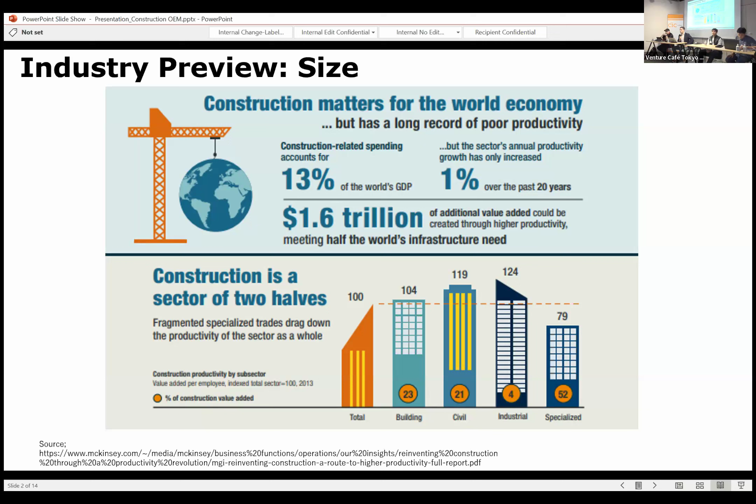I don't have the percentages top of mind, but a huge amount of contracts actually end up in litigation - settled in the courts rather than amicably, just because the general contractor always says what the architect's designing is impossible to build, blah blah blah, I need more money. So it's a lot of fun. One reason to talk about this is each of the roles in the construction space have a very different objective, so it can be quite hard to get different people to sign off on getting these innovations into that space. So that's the background on this slide. Again Mike, jump in if you think there's anything we should double click on.

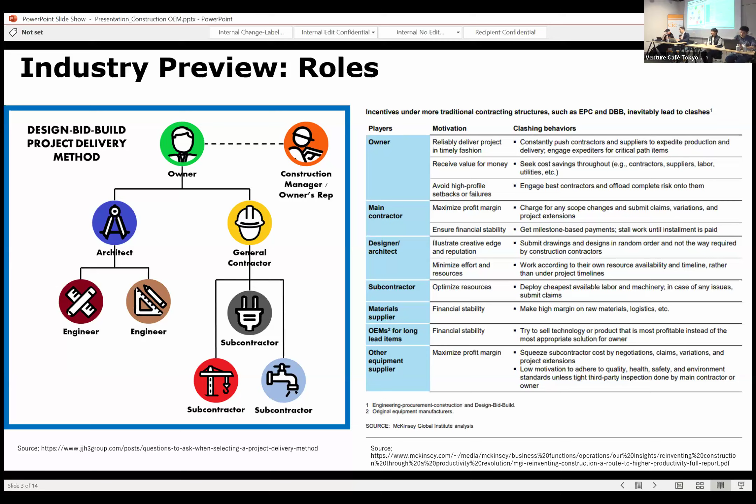This is 1,000 times more than I know about construction, so please, you have free reign. It's 1,000 times less than a general contractor would be able to add, but yes, if you want to double click, be the questionnaire. Sure.

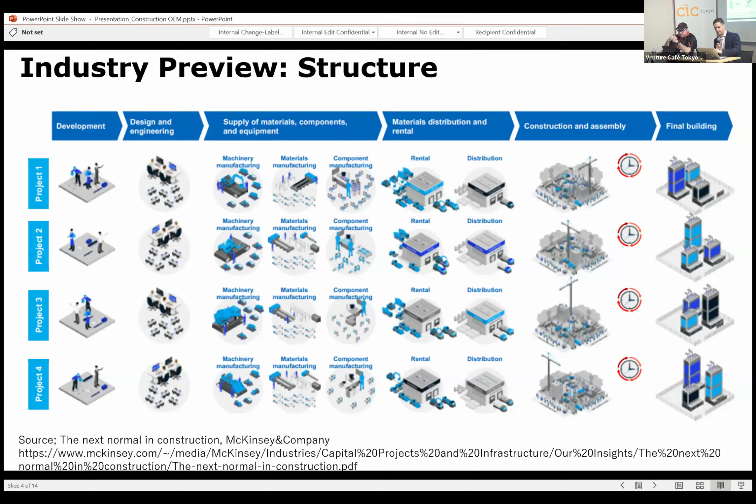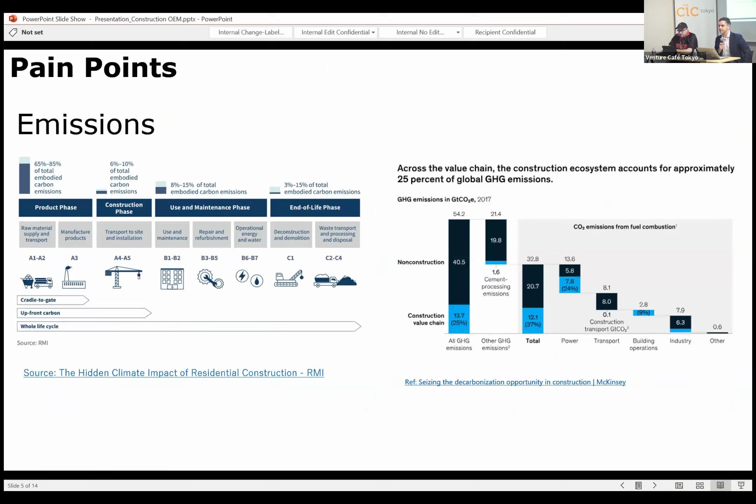I'd like to highlight some of the pain points, and this will probably lead into discussions on what we can do. One of them was obviously emissions. Up to about 85% of the embodied emissions are actually in the product phase, while the products are being built and constructed. We see on the right-hand side that about 25% of global emissions are coming from the construction industry.

Yeah, I have a question.

Regarding the labor shortage, do you find that there are more shortages in certain parts of that chain than other parts? Like maybe a lot of people really don't want to be on the site building, but they're okay with doing transport or production. It depends.

Yeah, that's a really great question. And the answer is it depends. To expand that a little more, it depends on the country. If you talk about Japan, the 2024 Nen Mondai that people talk about with the labor laws, which impacts a lot around transportation, you don't have enough. People aren't allowed to work as longer hours from a safety perspective. So different markets have different issues, but globally there's just a shortage.

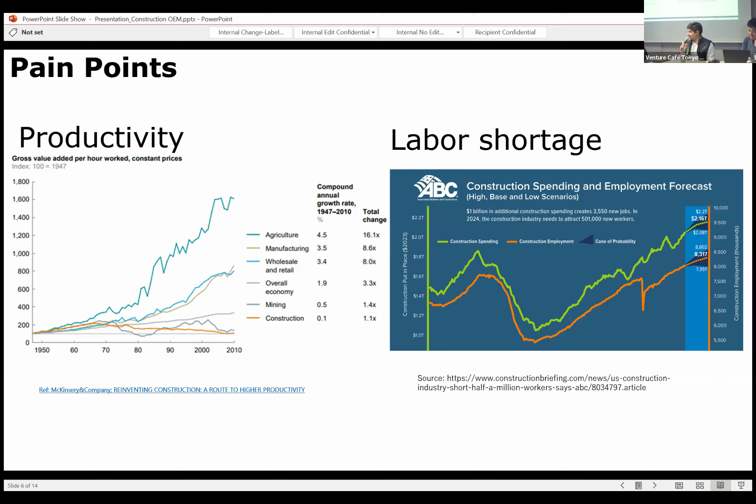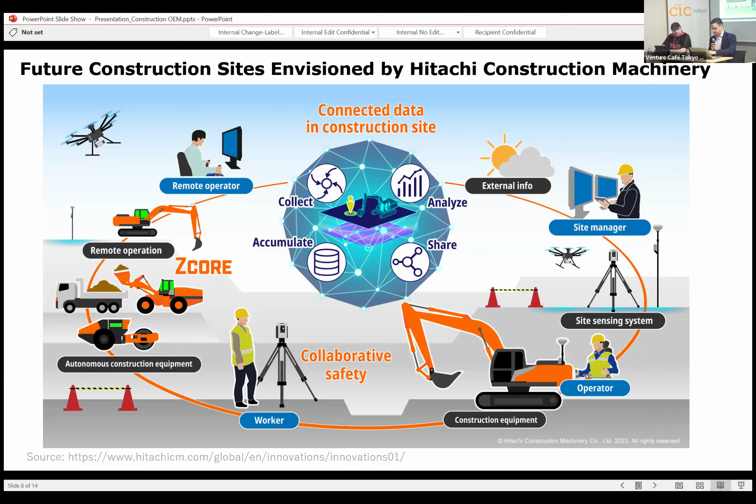So there's two ways that we're looking at this from an OEM perspective, again being quite specific, so you'll have to forgive me for that. One is having that real-time digital twin. So construction sites are moving towards having a BIM available, and BIM means building information model. And if you have a really good quality BIM available, you're able to measure the progress against how it should be. And to get to how it should be, you need to be able to bring that data out of the site really effectively. So we've made some investments in that space in some Japanese startups, which are helping us to do that.

Quick question - if you can go back one. The ZCORE in there, how much is that a black box versus you being able to define inputs to outputs? If you say it's making judgments, is it very definable, or is this more of a potential for hallucination, Gen AI type issue? No, it's not. It's a lot more stable than that.

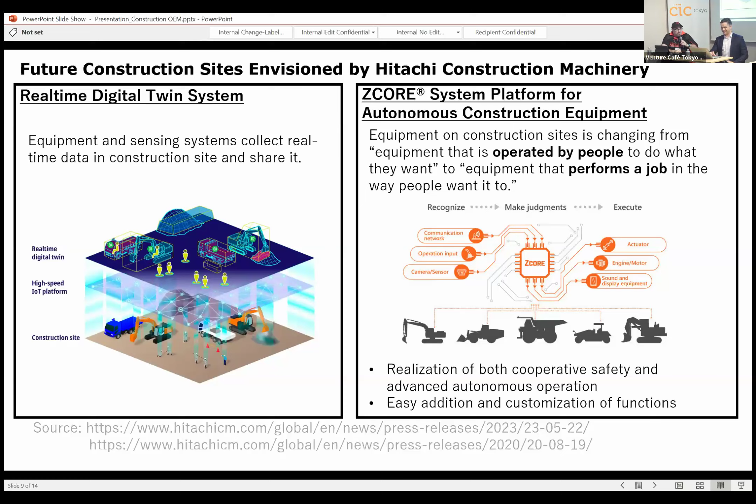Actually, this might be—how many more slides do you have? So this might be a good transitional point. Do you want to explain what drive-by-wire is in terms of traditional robotics and automation?

Sure. Well, drive-by-wire is essentially a way of saying that before, we had cars where you could basically send commands and have things move, like the steering wheel or the gas pedal, or even think of a plane. So basically it was all mechanical, which means someone actually had to be there, push something, and that would be a hydraulic or whatever, and something would get actuated, something would move.

But instead it all became, let's say, computer control, in the sense they were all electronic signals on something called a CAN bus, which meant digital information was being sent all over the car, and based on certain little computers receiving that information, it would do certain things, like put more fuel into the engine or increase the brake pressure. Things that were all done by the human, now a computer has to be able to do, but the computer doesn't have arms or legs, right? So that's why the concept is wire—as in it's wired by digital means, but it's actuated by a computer, essentially.

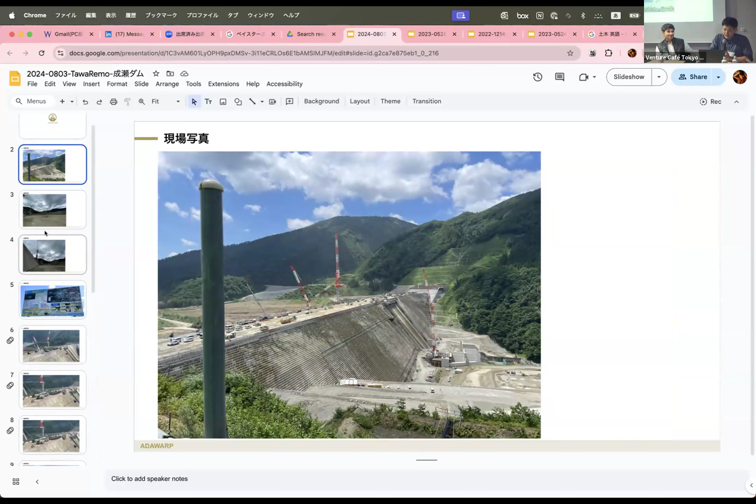Yes, so first I'm going to tell our company's use case. This is the construction site of the dam in Akita. This is called the Naruse Dam, and this construction site is Kajima's project. It's open, and we control this tower crane from 1 kilometer away.

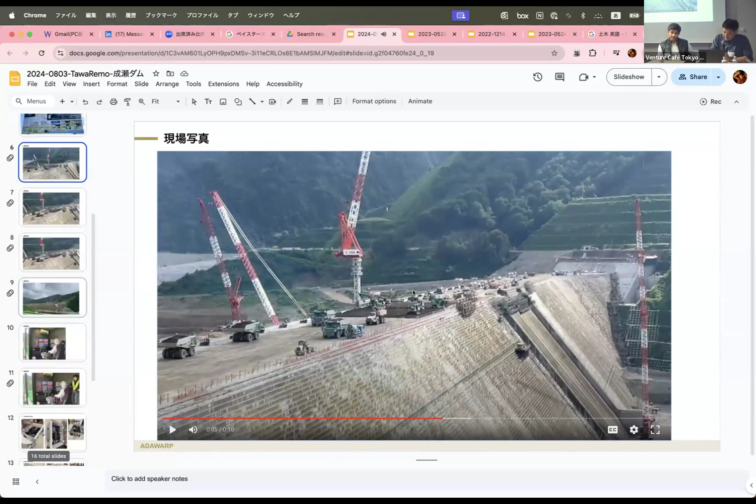Is there anybody in the crane at the time as a sort of safety backup, or is no one in there? No one's in there. Wow. Yeah, so this is the cockpit.

But the point is it's still 1 kilometer, and this is the construction site for a dam that's really far from the city, so no one wants to go there. Right now it's 1 kilometer, but they want it to be more, like 10 kilometers or 50 kilometers. But the point is, if some accident happens, who's going to be responsible?

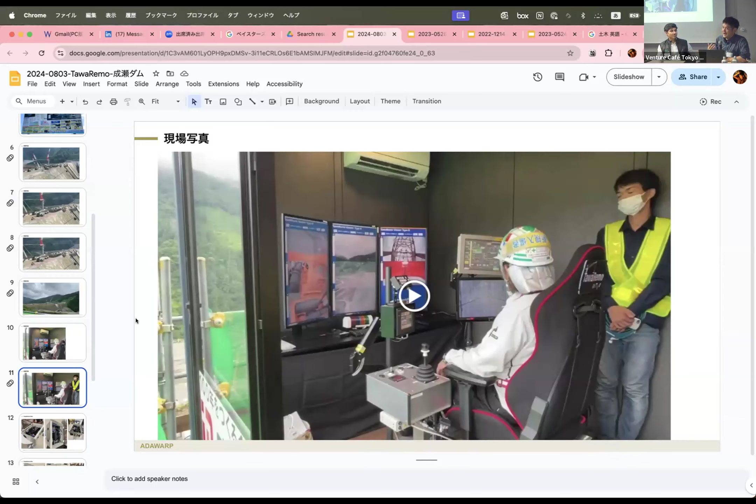A real example is lightning. Because the crane is really high, it's often struck. After lightning strikes and the PC or something is broken, who's responsible? That's the current problem we're facing. And latency, of course, is really important, but recently we can do Zoom or Teams, there's a lot of technology now, so currently latency is not a big problem. It's more about construction site safety and care.

I guess if you're not operating in terms of silicon wafer processing or online gaming, you're not operating at speeds where you necessarily need to be super quick. But I'd imagine there are certain places where that matters, like a safety system meant as a backup for a wire breaking, where something needs to act very quickly. Are there any critical points in the chain that need super low latency, and is that possible now from a distance of 1 kilometer or more?

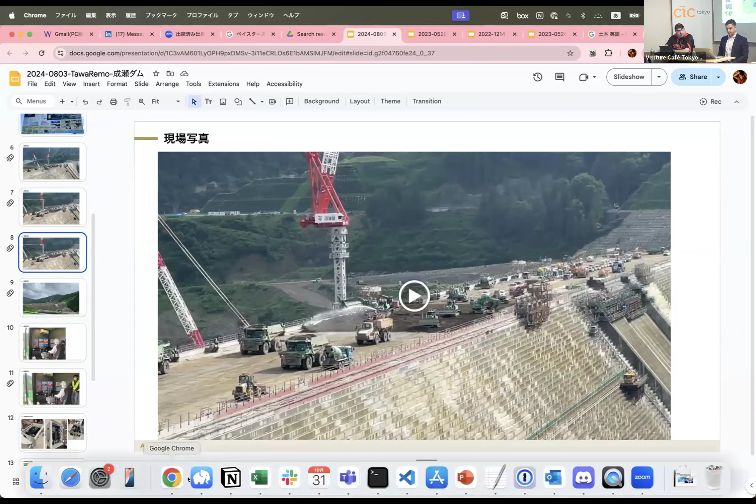The latency is about 0.8 seconds from the United States to Japan. Inside Japan, the latency is more or less 0.3 seconds. At 0.3 seconds it's okay, but after more than that, like 0.5 or 0.6 seconds, the human starts to feel the latency.

It's gonna be late, so it's a little bit more dangerous. So that's the point, but the technology is now coming.

Can I comment on that one? We had the same problem on construction sites when we had people operating remotely. Around 0.2, 0.3 is a really good line where, like you said, there's a lot of older people on construction sites and they've been doing it for a long time and they're like, this game doesn't work, and they just get frustrated and go out and sit in the equipment. So yeah, that's a big issue.

As long as they don't rage quit the construction site. Yeah, we could have a whole session on latency, so I'll skip my comments.

But I used to work for SRI International, and when they first did the first iteration of the Da Vinci robot, which became the Intuitive Surgical robot, it was for remote battlefield surgery. So we're talking like thousands of kilometers, and they even did a demonstration of it basically remote in space. So I guess there are strategies to deal with latency, and many ways to solve it, I would say.

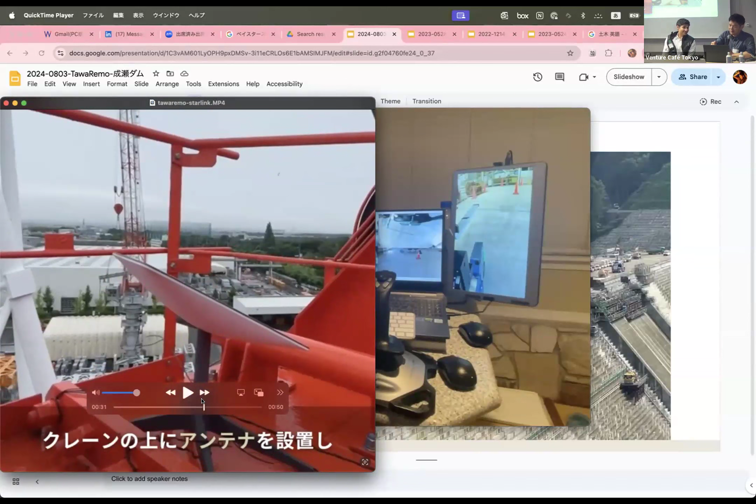Yeah, now recently we use Starlink for the remote control. For example, we try to control the tower crane using the Starlink system, putting the Starlink antenna on top of the crane, and we're gonna control it.

But the problem is the connectivity is sometimes unstable. So we're gonna develop the technology more. But to the moon, maybe it's gonna be 1 or 2 second latency, it's gonna be huge. So we should put some AI inside the construction site to work by themselves, or we have to create that kind of system, I think.

Exactly what Avik was saying. Yeah, I was trying to say that you have to build more intelligence on the edge. Yeah, essentially.

So actually, just very quickly related to that, this reminds me of something Toyota was focusing on. Instead of going for full autonomy in self-driving, they also had a driving system called Guardian, which was sort of a shared autonomy system. Do you see this in construction now? Just the introduction of some mild autonomy to help assist rather than full autonomy or full teleoperation? Yeah, 100%. Can I share a video?

Would that be okay? And do you have the score on the game as well? Have you been checking? We forgot to ask.

So give me 10 secs. Sorry guys, oh, where did the PowerPoint go? No, it's not allowing me to share the PowerPoint anymore. Yeah, I can do the whole screen. Sorry guys, technical issues. There we go.

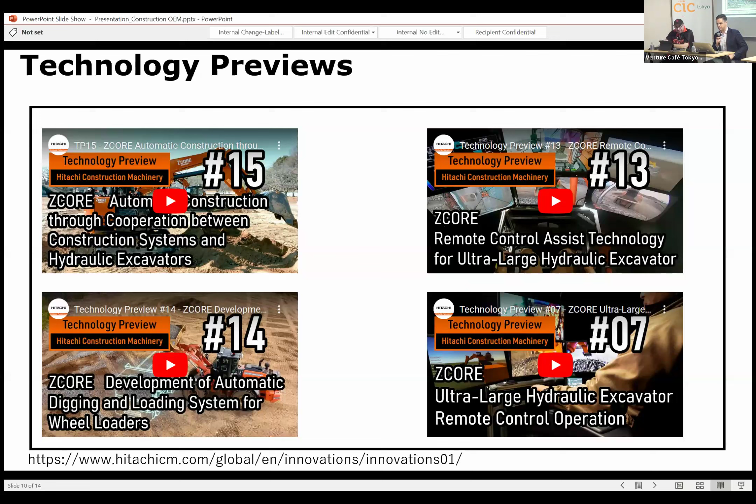We're back. So there's a few different angles. We didn't really touch on it too much, but the thing that robotics are really good at doing is repetitive tasks, right? And the thing that's often happening when you're doing excavation... let me go to this one. How do I go full screen? I can't, never mind, okay sorry, everyone will just have to have their glasses on. The thing that's often happening when you're doing excavation is, number one, you might be far away.

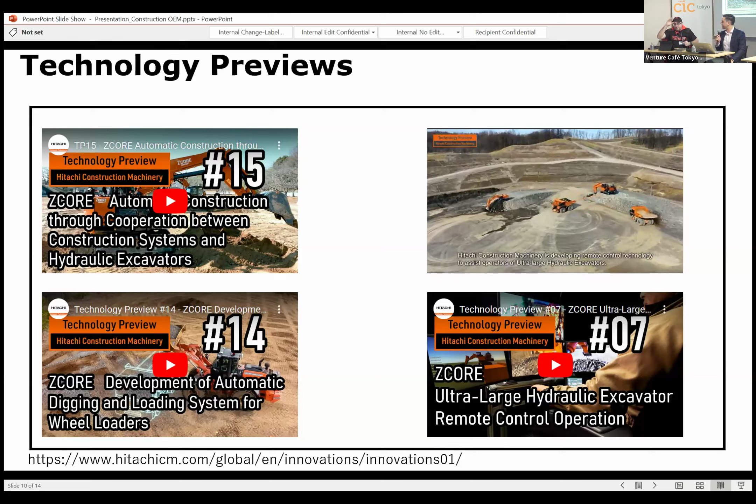So for us, the similar analogy would be in the mining space. Mining is often happening not next to cities, it's happening where the mineral deposits are. You have what are called FIFO workers, fly-in fly-out workers, normally two weeks on, two weeks off. They have really, really high salaries because it's not a very nice job, so you're talking easily hundreds of thousands of dollars per headcount. In the mining space, all of the OEMs, including us, have already basically automated the dump trucks. So that's low-hanging fruit. When you get to the excavators, there are so many more angles you have to work with that it's not as easy to do.

So what we see happening as sort of a progression is there's that driver assist function, like you said. So you can see here, it's sort of assisting the excavator operator. This is linking back to the experience.

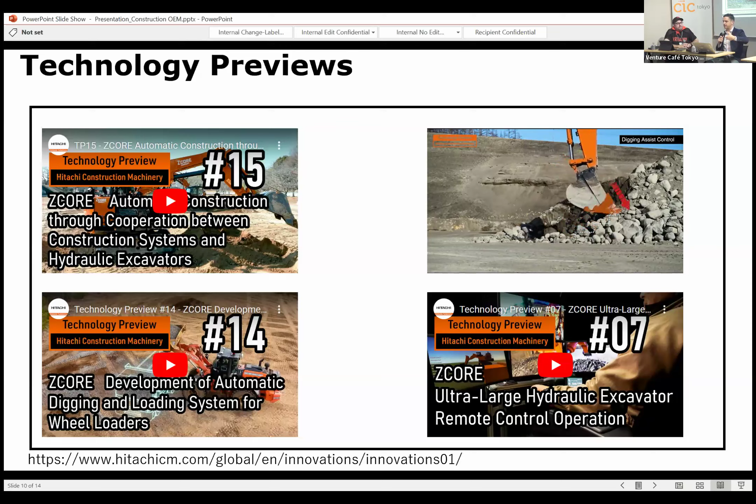When you're losing those experienced operators, they're not getting as much material in the bucket because they don't have the experience to know how to do that. If you're remote, you lose some of that feel as well, linking to gaming. That haptic feedback is actually a really interesting thing to be thinking about in terms of these remote operations.

And then you're doing what you see in this video: you're picking it up, you're putting it in a truck, picking it up again, not very exciting. Humans, in my understanding, kind of suck at doing the same thing over and over again. Robots do not. So on this excavator, you can see he's about to hit the truck, and it'll automatically lift up for you. It's a driver assistance system that takes away the boring parts. I wouldn't say there's so many exciting parts to digging stones, but it takes away the boring parts and helps improve productivity on site.

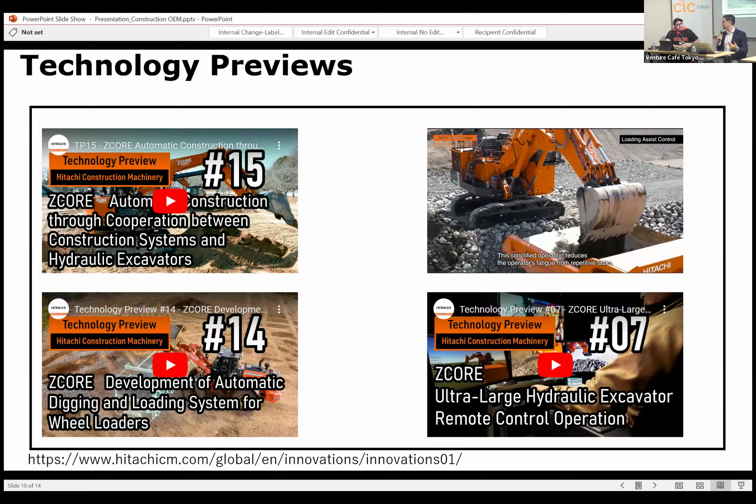That's sort of where everybody's already starting to play from an OEM space. It will move towards, if you have the connectivity, remote operation, because the harder parts still work better with humans. That scooping, that loading, you can assist on it, but actually humans are much better at doing those tricky parts. Point-to-point automation isn't that difficult, right? You run a path, you tell the robot—in this case a wheel loader or excavator doesn't run point-to-point—tell it where to go, and it does it.

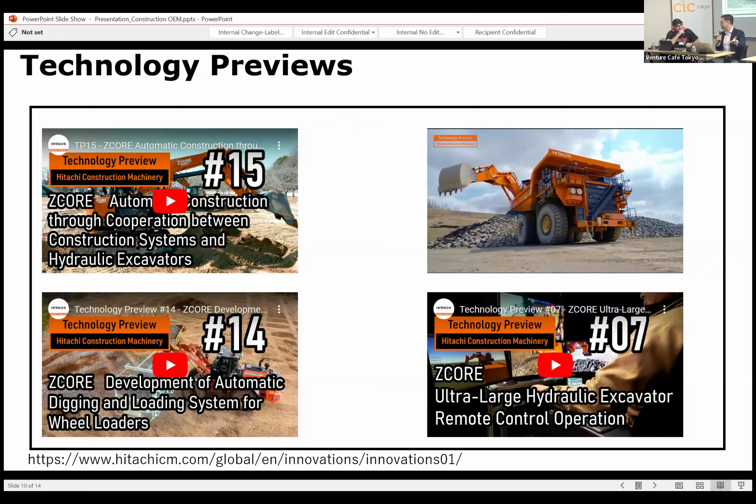And then after that, once you have enough data to understand how the best humans are operating the equipment, that's when it'll come back into your full autonomy play around.

I switched mics. This was going to be my next question.

There's something called imitation learning as well, which is sort of taking motions and experiences from humans operating robots and then incorporating it, having the robots learn how to operate. It sounds like there are aspirations, or at least beginnings, of doing this. Avik, I'm sure you have something.

I personally am not working on this, but I have noticed, because we work a lot with warehouses and forklifts—forklift automation, that was cool to see that video. You're aware of the ex-TRI person with Third Wave Automation. They're the people working on truly fully automated forklifts, but they realized there's not going to be an automated forklift overnight. So instead, what they did was instrument the forklift with as many sensors as possible, sort of like a self-driving car of forklifts, with lasers, everything.

I don't know exactly how all this networking works, but regardless, they have enough cameras and lasers, and they started with this notion of shared autonomy. The idea is they were able to train in simulation how to do the task, but when it came to an unstructured, real warehouse, it was almost impossible to guarantee. So what they did was have the forklift go from point A to point B and try to do the task, and the operator would either be on it all the time, or it would only alert the operator before—I don't know the exact details—but the idea is the same. They're basically collecting data from those trials, recording everything, and the idea is that eventually the system will learn how to recover from those situations and use them. So it could be called imitation learning, but imitation isn't really a good word, I would say. It's more like some sort of reinforcement learning. That would be my thing on it.

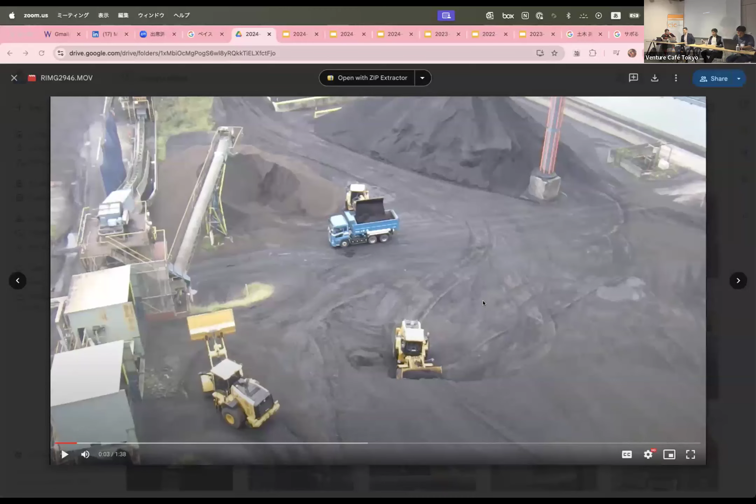Unless anybody else has anything to say on that, I have a question about Stephen. I'm going to share our—and then after this, if you wanted to share yours. Can you share? I didn't bring it, but I can absolutely share it. Sure.

Now we're wondering—this is one of our clients. This is the charcoal site in the factory, the material factory. They have their own power generation, and they have to put the charcoal in every hour, 24 hours a day, every day of the year. They cannot stop putting in charcoal, and there are 8 people controlling these 3 machines, but the average age is 50.

Can you help with this problem? Well, that's what we need to do. I think this is a perfect example of what I was talking about before in the aggregates plants. We see in cement plants and these kinds of spaces where they're not doing difficult things per se. Depending on the consistency of the material, one reason you want a person doing the loading and unloading is what happens if you hit a large rock.

What happens? Look at Waymo, right? Look at how much time and money they've raised—billions—and how much time they've spent on those edge cases. I was talking to a guy from Waymo the other day. They said every 300,000 miles, at least one person is going to end up on the hood. That's an edge case they now know happens every 300,000 miles, because they've driven so many miles. That's the level of data you have to build up in an uncontrolled environment.

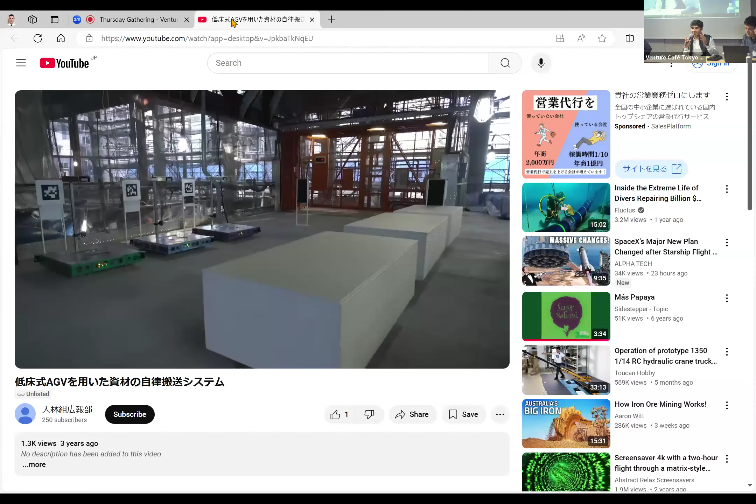So the pain point here was the fact that on Japanese construction sites, commercial construction like big hotels, there are large sites, but they're also very constricted sites. There are very narrow corridors. And so after the construction reaches a certain point... do you want to pause it for a second?

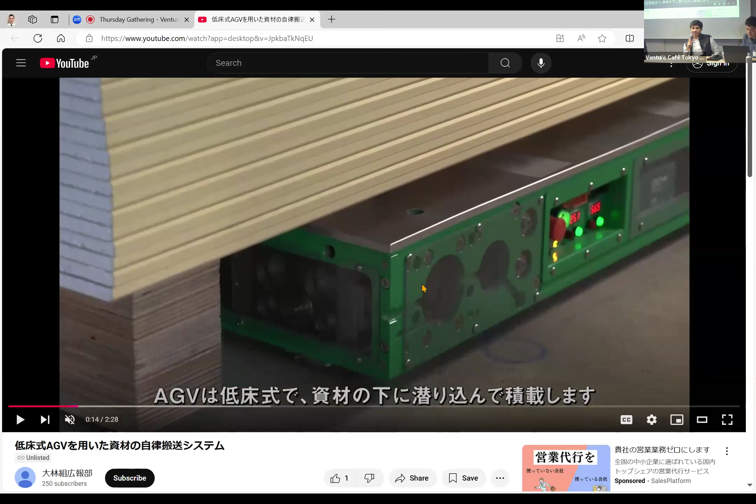So the idea was that after they have built up the scaffolding and the floors and maybe the walls, there was still a lot of material that needed to be moved from the ground floor, where the trucks drop it off, to where it needs to be for the worker to work on it, like drywall or large metal frames that needed to be put up in a specific location. So imagine the worker comes in, does the morning exercise, and he's ready to do his job, but instead he has to take a low horrible little cart, put this heavy material on it, push it all the way, use the construction elevator, go up to the floor and deliver, and keep doing this until enough material has accumulated so he can start his work.

So this, to them, was a huge pain point, and they wanted to solve it with these AGVs—you can play the video—and they were pretty cool.

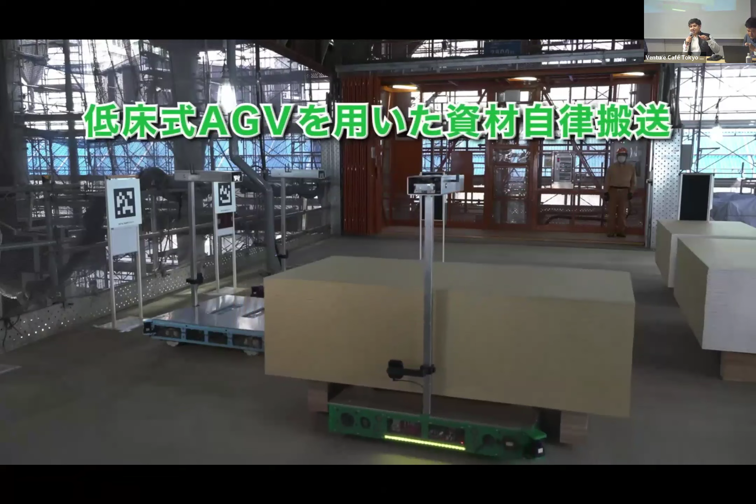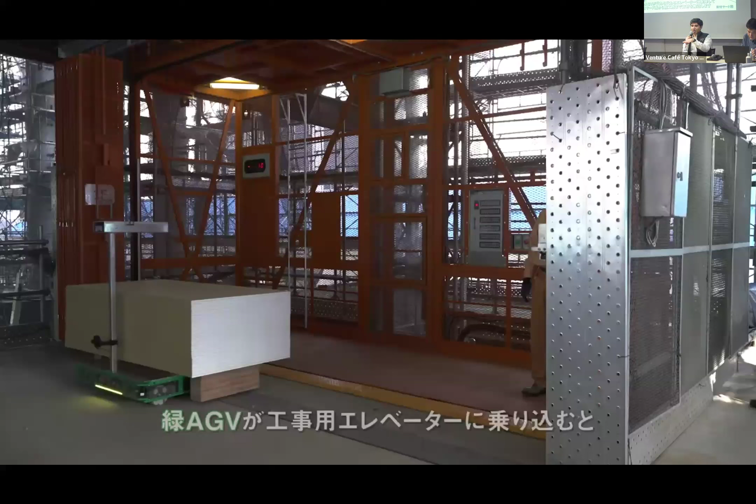They were very proud of the design, which meant it could literally go under the pallets or whatever. If you put it on two lumber supports, it could just go under and lift up with its whole body. It was very low, and it had mecanum wheels, meaning it could move sideways. Normal wheels can't roll sideways, but this robot has special wheels, so if it's carrying a very long and heavy load but wants to go down a narrow corridor along the side, it can move that way. So those were the special things.

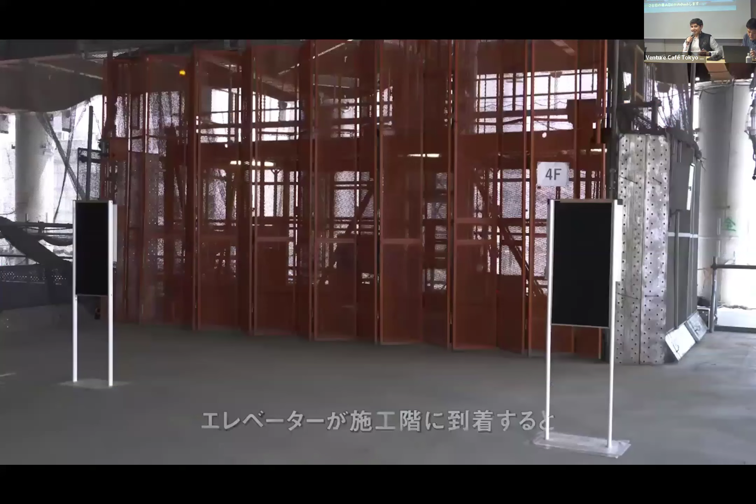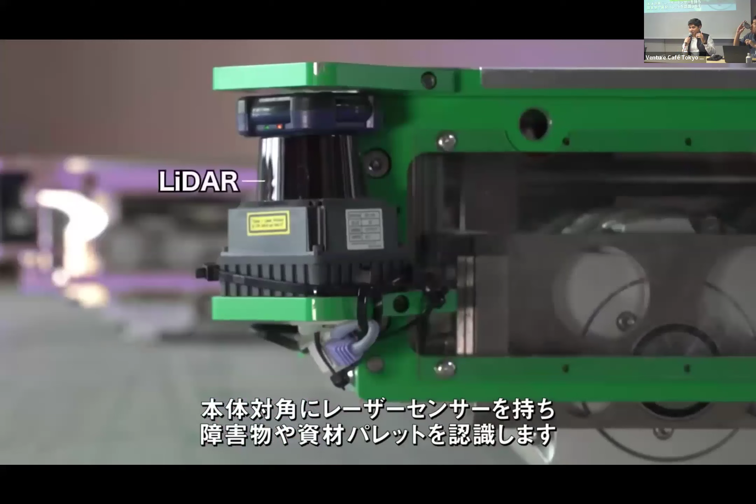But the problem was they had the AGV, but no idea how to move it autonomously. So they had joystick control, and they came to us, and we developed the entire autonomous system using computer vision and LiDAR on the robots, which also coordinated between multiple robots to do the job.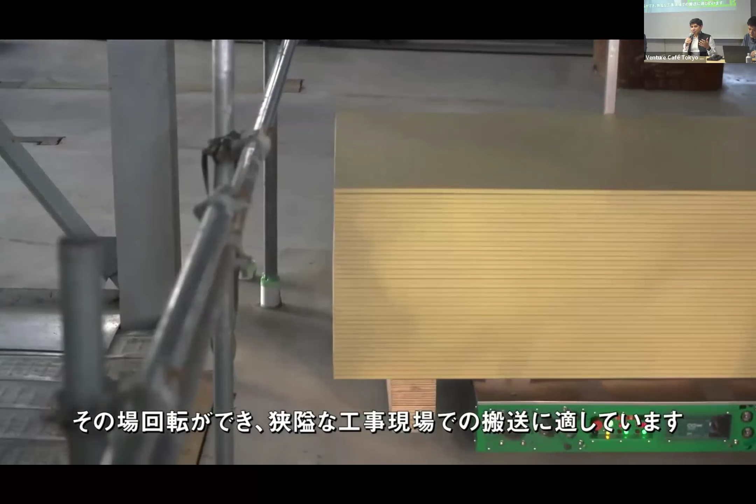Now, this was challenging for a couple of reasons. One was, of course, the fact that you're carrying a load that's bigger than the robot, which is not usual. In robotics, normally you don't have to deal so much with robots carrying loads bigger than themselves. So that was one challenge—you had to have some idea of what you're picking up, because that's going to affect things, like you might hit a wall since the load is bigger than you.

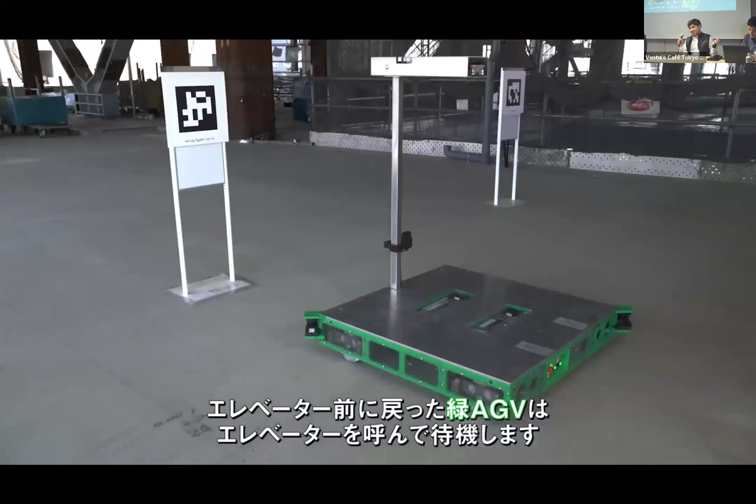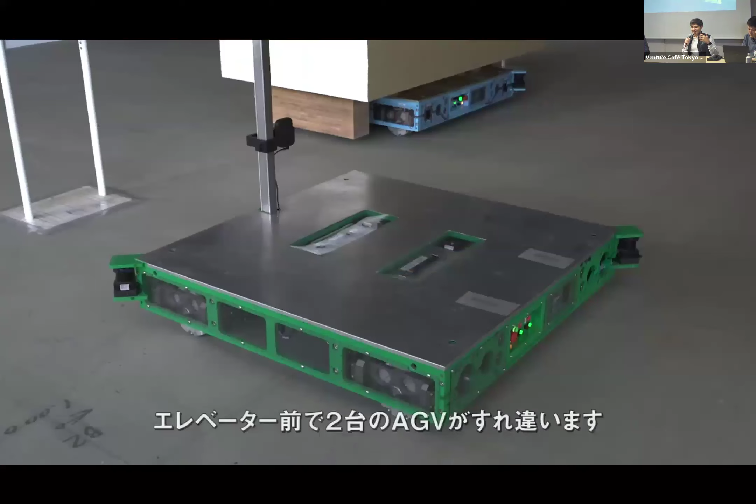So that was one of the challenges, and the environment was changing every day because it's a construction site—they're putting up walls and structures here and there. So it was a visually very hard environment. The technology I'm working on with my current company, Guide Robotics, is the same—basically GPS-denied navigation and situational awareness—and that's what was enabling these robots to do their job.

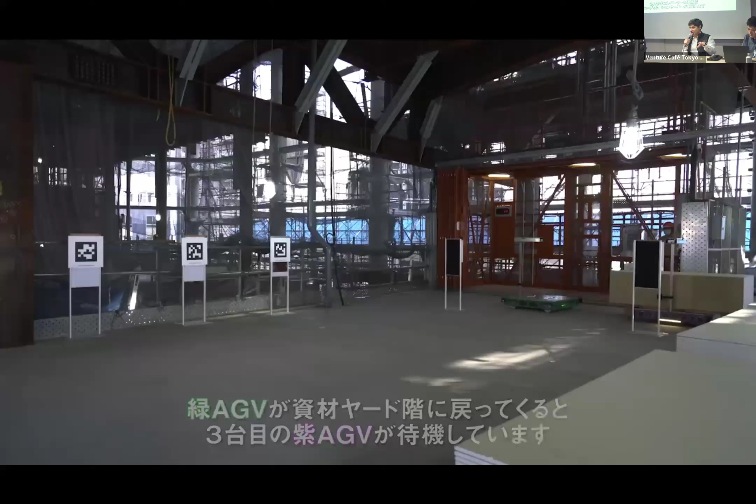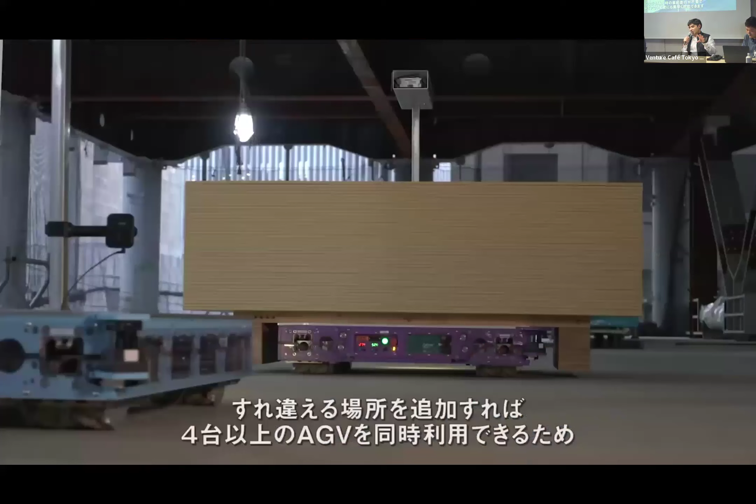Now, all this is interesting in the sense that we delivered the autonomous system, which worked as expected, meaning the site manager would put up a mission saying the loads are going to be delivered at these locations and need to show up at these other locations, including talking to the elevator and all of that.

Now, everyone probably wants to know what happened, right? So this was 2020, and this was delivered. So are they using it in every site in Japan?

Well, the answer is, while this was introduced very gently with multiple demonstrations to the construction sites and everybody liked it, when it came down to actually using it, the older people at the site and the managers were essentially not comfortable with fully autonomous robots moving around on the construction site.

So they would rather prefer to have it remote controlled. This was another case where, again, networking was terrible—so that's why this autonomy would have been easier.

But instead, they were like, no, we want remote control. And remote control initially was just joystick, but then you have to basically walk behind it. So that's where things are at. So I'm wondering if this is an issue of either it being too advanced, where they want to scale it back and have some more control over it, or perhaps there's other technology that can help here.

So it depends on what their pain point would be. Maybe they didn't want it to be autonomous because they couldn't predict what it was thinking at any moment or where it would go, in which case we can maybe solve that by having projection mapping of the path it's going to take, some sort of augmented reality. What, in your opinion, was their actual pain point?